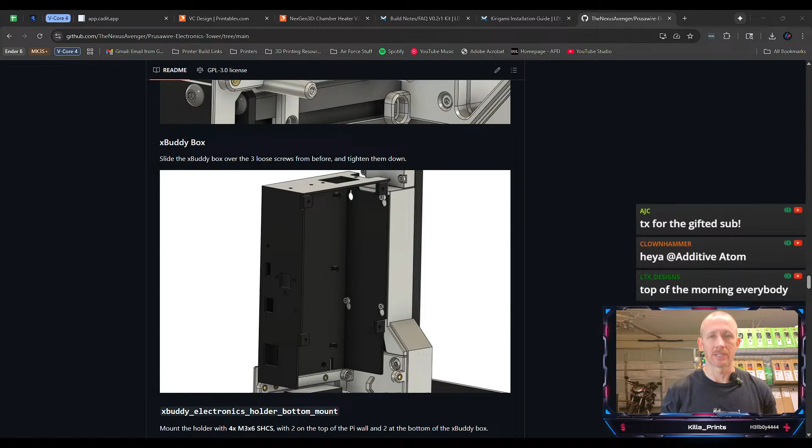So this is where we left off. I didn't have the buddy box, and so that's why we had to pause on Prusawire. But I did order it. I would have finished this last week, but it took exactly 8 days from the day I ordered it to the day it arrived, which meant it arrived Monday after stream. So I've had the buddy box in hand for about a week now, and it was pretty affordable, I think 20 bucks or something. This is it here.

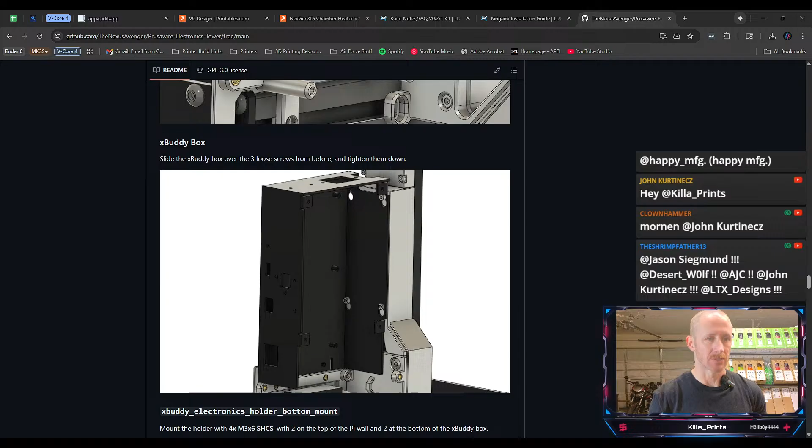So this is where we left off, and basically we just slide this onto the printed parts that we've already installed from before. And then I can add on a couple more pieces here. I believe I have this piece. Pretty sure I have that piece. I thought I did. I could be wrong here.

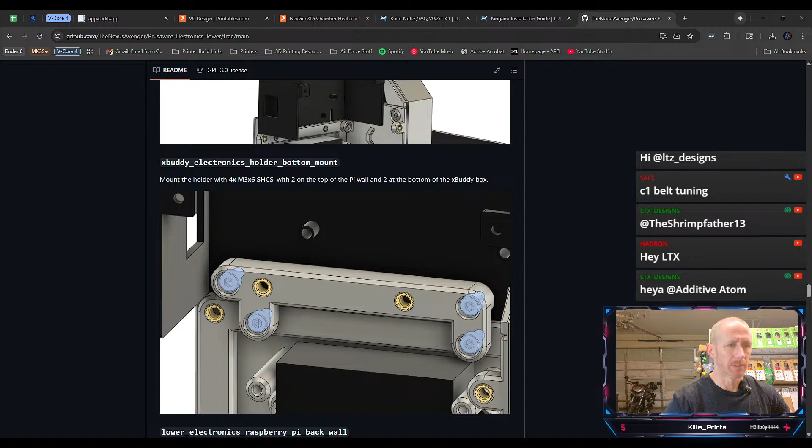But 2 on the top of the Pi wall and 2 at the bottom of the xBuddy box. Yeah, I feel like I printed that, but I'd have to find it. So let me show you where we are on the machine itself.

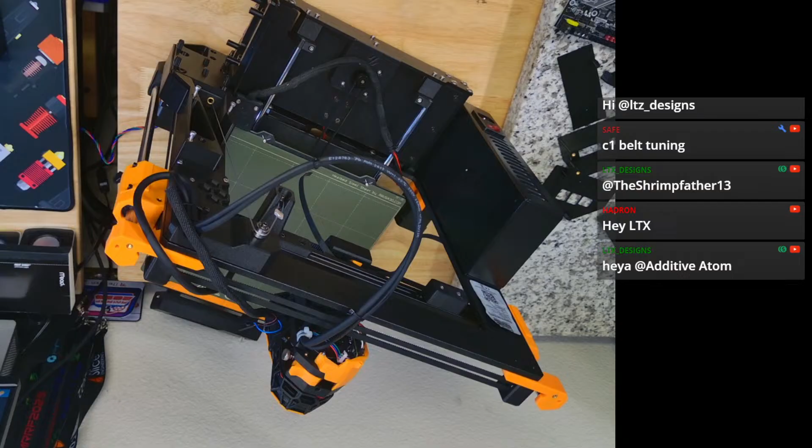C1 belt tuning. What is C1 belt tuning?

What is, oh, and my camera's upside down. What are we doing today? Come on.

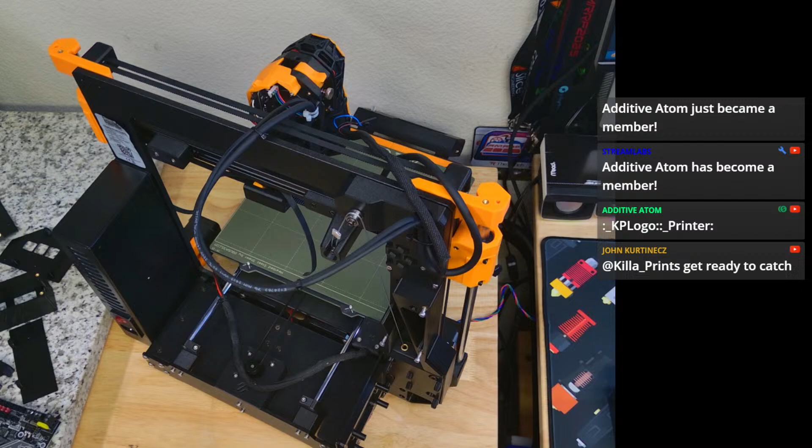We'll flip it that way, and then we need to flip it the other way. This is what happens when you do a Friday stream and then need to reset up all of your cameras and everything, because the Rat Rig is so big it doesn't fit in the screen.

But this is the Prusawire that we've been working on for a while.

And get ready to catch. What am I catching? Get ready to catch. I'm not sure what you mean there, John. You're gonna have to explain.

But anyway, this is where we kind of left off, and you can see I've got - this is not gonna work well, but we've got some parts left from last time.

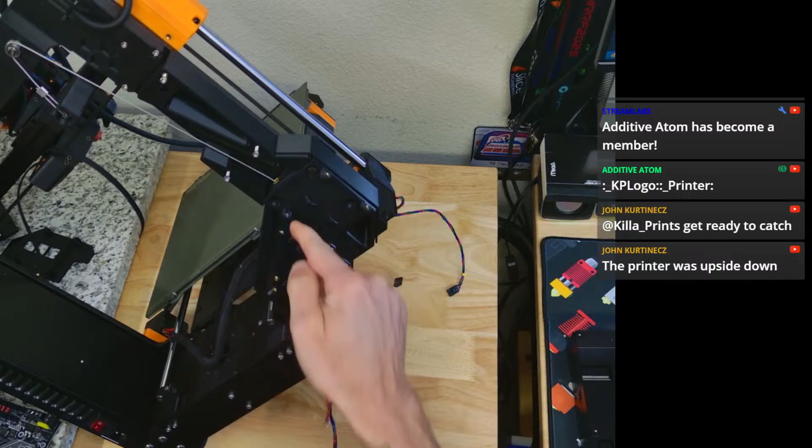What I need to do now is take the Prusa xBuddy box here, and that sort of goes in that location there. And then there's another piece that screws into these heat inserts and into the box itself, and that allows things to connect together. But I don't see that part immediately, so I've got all the parts just off camera here to my left.

And there's one piece that I don't know that I have, and so either A, I failed to print it, which is totally possible because I do that a lot, or B, I threw it away without realizing that I needed it.

So it could be - I have these small crates over here, they're just collapsible milk crates that I put all my Prusawire stuff in, and it makes keeping things together a lot easier for me. But the problem is I just kind of threw everything in here. So it could be, in this case, it could be not.

Just give me a second to see if I actually kept this item. I don't know that I did. I don't know that I did.

Yep, so we're gonna have to print a new one, and that's okay. That is perfectly okay.

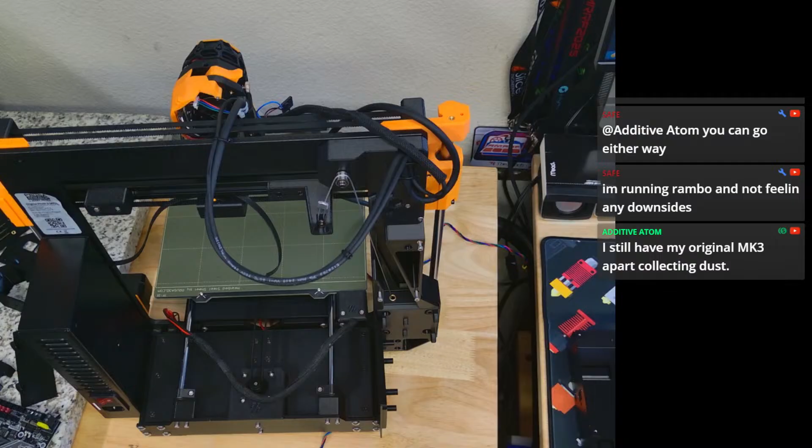Such a nice design, the print. Oh, the printer was upside down. Yeah, sorry, I got you, John. Yeah, I'm a little slow.

All right, so this goes on here. I can print this part later, I'm not really worried about it right now. But that goes on like that. And I know the angle is a little weird, but it's the best I can get without completely removing the Rat Rig.

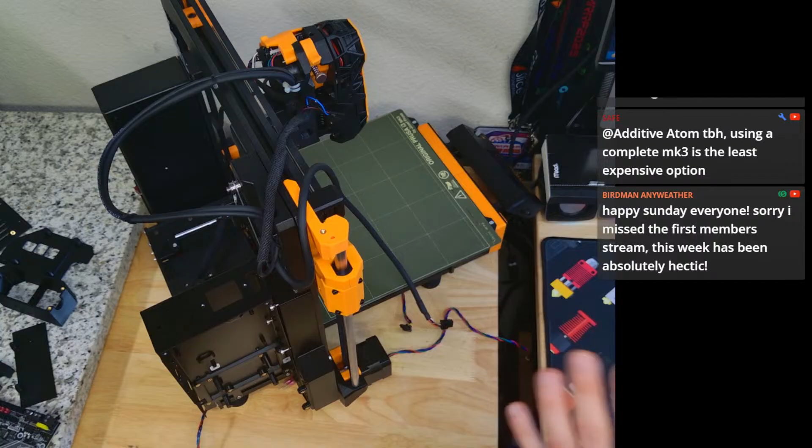So just off camera over here is the rat rig, and it's still up on the bench top. So I've had to move everything so I can have room for this, which changed all the angles a little bit. So I was hoping that more of a top-down look would be a little better.

Running Rambo and not feeling any downside. Does the Prusawire use the Rambo 8-bit board from the Mark III?

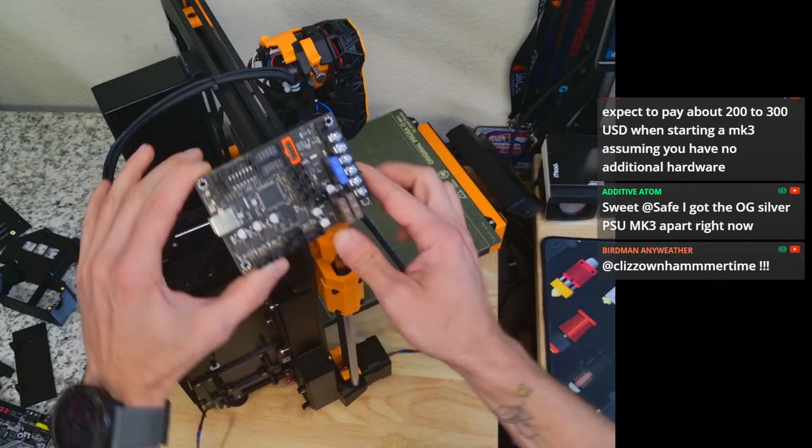Additive Atom, you can use either. So you can use the Rambo board, but I believe you need to run it via USB. So I've got my original Rambo board here, and whoever wins this printer in the raffle will get the Rambo board originally. So this is it here.

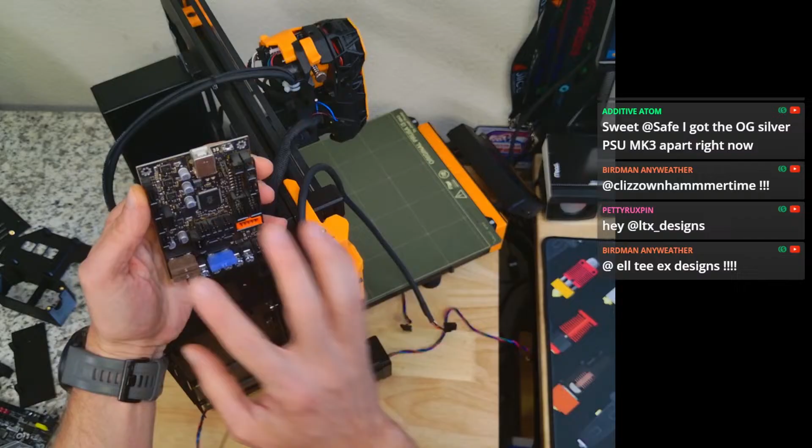It's supposed to work with this, and I will include the case for it if you want to revert. But from what I can tell, I couldn't get it to go. So what I had to do was use the USB-C port here, and I'll include the cable as well. And then that would need to go to whatever Raspberry Pi that you're running, and supposedly they talk, right? But now you have to run a separate power source to your Pi and some other things, and it didn't look as clean as I wanted it to personally.

So instead of using this, I'm going to put in here this. This is the SKR Mini E3 V3. Any Ender 3 style board will work with this. And this will allow a lot more capability in Klipper. So we can run Danger Klipper. We can do extra heaters if you want to, and you can use this for lighting. There's some extra capability you're getting with this board that you would not get with this one.

I hope that answers your question. You still have your original Mark III apart collecting dust. Additive Atom, you got to make it into a Prusawire, man.

It's pretty cheap. If you wanted to go single color, it's one spool of filament and then a Raspberry Pi, which if you're running Octoprint on it anyway, you're probably already doing that. And then of course you need some bearings and rods and stuff like that. Even the motors are stock Prusa motors.

Using a complete Mark III is least expensive, correct?

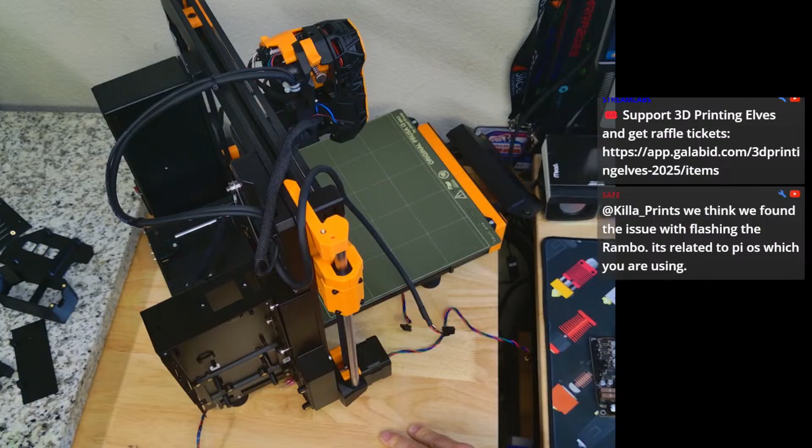Sorry. Killa Prints, we think we found the issue with flashing the Rambo. It's related to the Pi OS which you are using. Okay, so do I need to use a different OS, Aaron? If Pi OS doesn't work, what should I use instead?

No, that doesn't work. I need a longer one. Let's see this guy. Too short still. Let's see if I can get this in here. Gonna need a ball head for this one, but that doesn't really want to. There we go. That is tight.

You got lots of filament and pies, just would have to get the add-on parts. The original linear bearings went out. Your OG Mark III has been rebuilt to the Mark 3S before. I think I have some extra bearings.

I've got some suggestions on things that you might need if you're going to do this. So one of the things, if you're going to do the mod that I'm doing, this is from the Nexus Avenger. I found out about this case mod on the Positron Discord server, but there's a Prusawire channel, and that's where this mod comes from. But it's on Printables, and so if you want the link, I'll drop it here in chat for you, and then you guys can follow along.

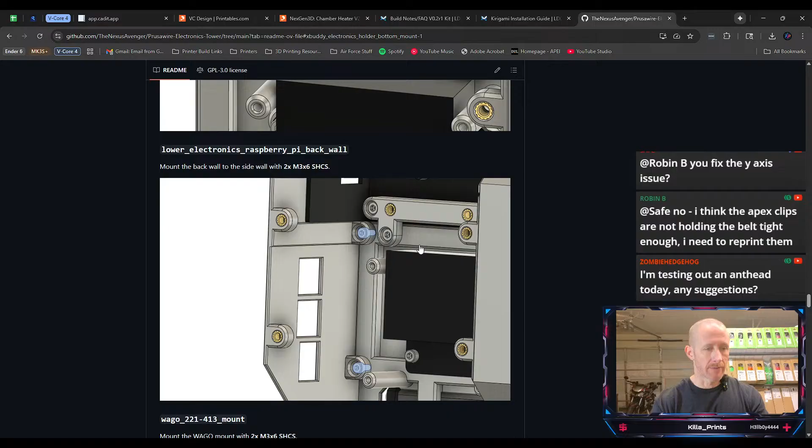And so I'm hoping that I can just do the install and add this on after the fact. But I want to scroll to see if it is blocked by anything. I think it mounts underneath this little portion, so probably gonna need to get that sliced up.

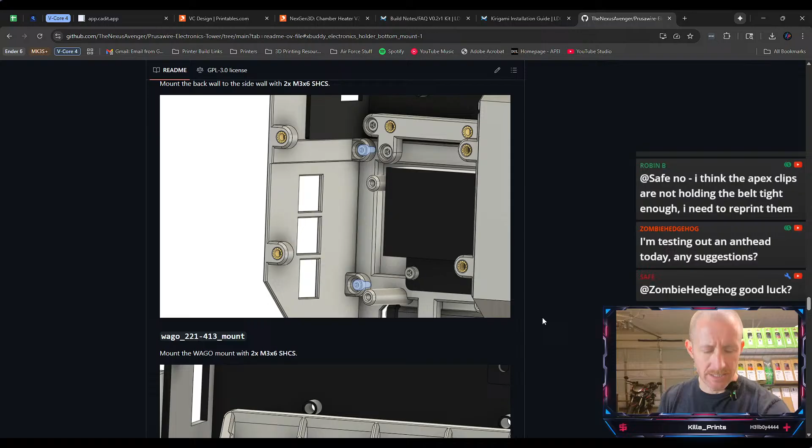That's unfortunate. Let's see, let's do, what did I have on here? Oh, rat rig stuff, so we'll do a new one. I'm pretty sure I downloaded all of this. Let me get over to my folder here.

Electronics tower, and this is called the X Buddy electronics bottom holder. Yep, looks like it. Let's get this going on the H2D while we are talking here.

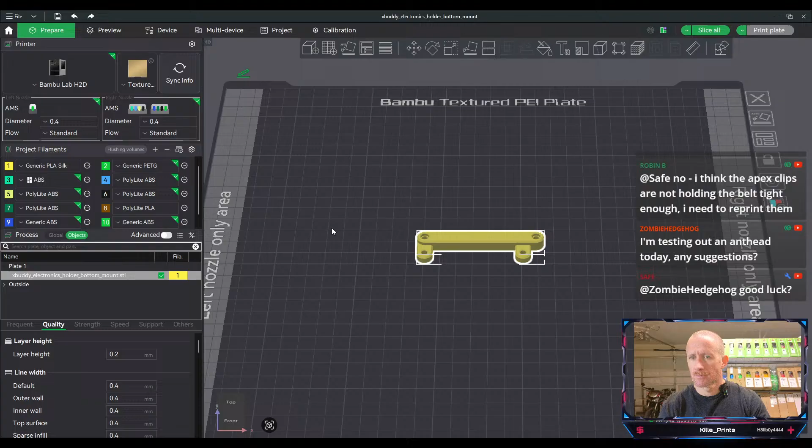That's going to be ABS. Got that loaded, and settings look good to me. Using standard stuff. I think I'm going to turn on Arachne just because, and we could slice. Should take about 30 minutes or so to get through. It's not too bad.

Just double checking everything, making sure nothing crazy is going to happen here. Looks like we got the counter bore bridging inside the hole, so I'm not worried about that. Drop in a few heat inserts and it should be good.

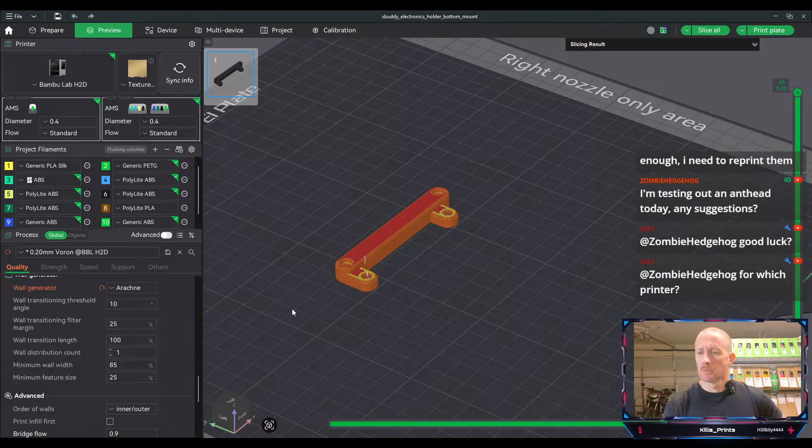Let's print that with ABS black. That sounds good to me. Everything looks good on the printer. Looks like it's warming up. Perfect, all right, we'll come back and check on this guy in a few.

But over here, looks like I can go ahead and add this high back wall piece on.

Testing out an Anthead today. Any suggestions? So I have not personally used Anthead yet, Zombie. I want to - I've got a Micron over here that I need to rebuild. But again, time and space to be able to do it.

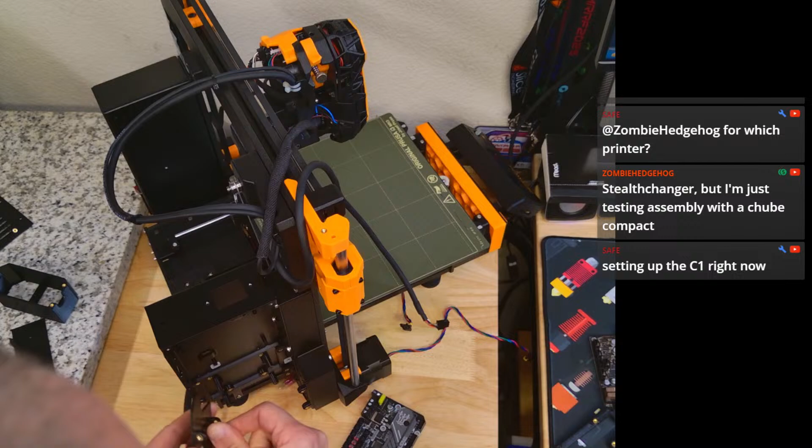What I would suggest though is take your time. It's a small print head, so the space constraints are something to worry about. It's tight getting your fingers in for your 4010 fans and things like that, and then keeping the wiring very neat when you're running a toolhead board. If you're running a toolhead board, that's what I would suggest. So just take your time and try to keep the wiring neat. Other than that, it's a pretty straightforward toolhead.

I didn't have too many thoughts on it other than that and dropping things on the floor. But I do want to use one. I have a spare Chube Compact that I would love to use with an Anthead. I just got - I made an order yesterday for a bunch of parts for A4T, so I'm going to redo the toolhead on my Trident to an A4T, and then put Anthead on the Micron. But again, time constraints.

Stealthchanger, but you're just testing assembly with a Chube Compact. Yeah, you're gonna love the Chube Compact if you haven't really played with it yet.

I don't know what 4010 fans you're planning to run, Zombie, but if you can get your hands on some high static pressure fans from either Fabrico, which I'll show you the ones I like to use for that kind of thing - this is one here, yeah, so I'll show you these. If you don't have any of these, I would highly recommend you do.

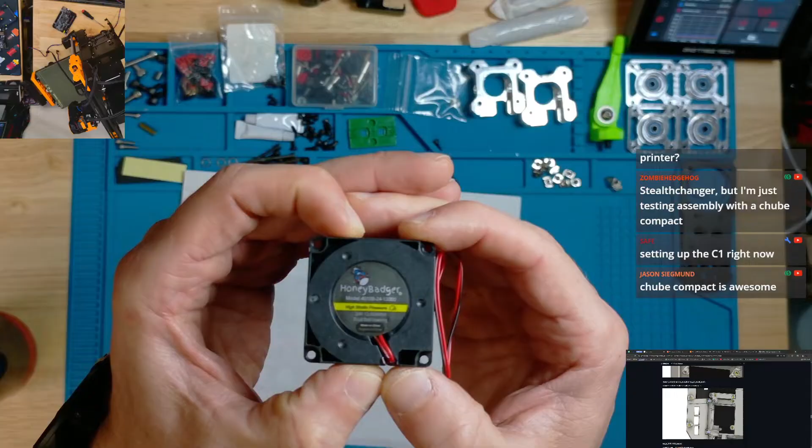So this is the Honey Badger high static pressure fan. It's a 12 volt fan - I'm sorry, this is a 24 volt fan, but a lot of them are only 12 volt. So pay attention to your voltage or you're gonna blow out some fans. These are a little more pricey, I want to say they're $7 to $9 depending, I can't really remember. You could do this one, which I really like.

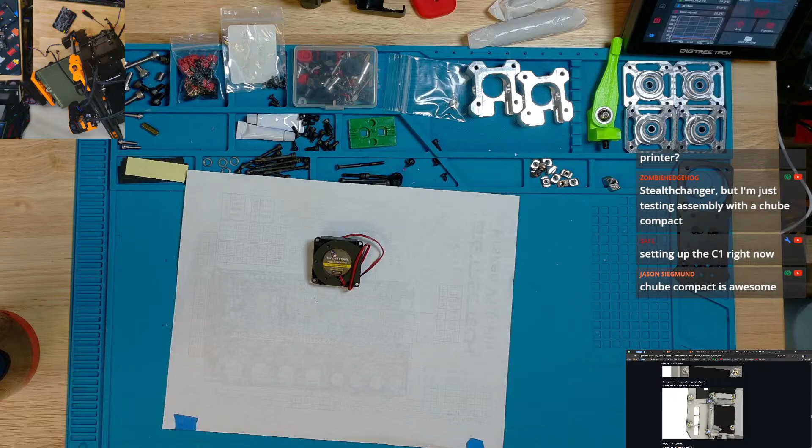They got a high RPM. But then also I've got some Berserker fans in here from West 3D, and they work pretty well. So here's another pair, this is another option.

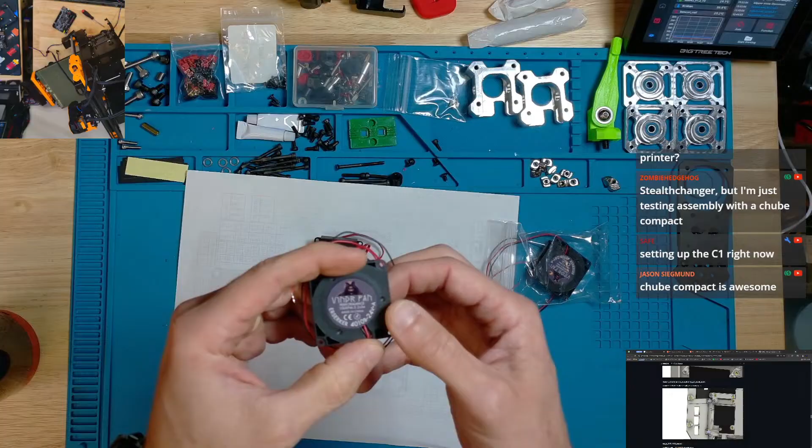These are 2-wire fans, so these are also 24 volt. You can do these. They do have different sizes though, so I think the Honey Badger fan is a slightly different size than a normal 4010. So pay attention to that when you're printing your parts. That's probably another recommendation I'd give to you.

Safe, what is the C1? I'm not familiar with that. What is the C1?

Chube compact is awesome, Jason. I've been running it on the Antithesis since probably late April. Typically I use Honey Badger fans. I've gone through and thrown away a bunch of no-name brand cheapo 4010 fans to really replace those sorts of things with quality parts. So I've been getting rid of a lot of my no-name cheapo fans, or using them for mock-up, cutting the wire off to test fit parts. Most of mine are Honey Badger or Berserker. I've got some GDS, but things like Winsinn and BQ and other no-name stuff, I've really gotten away from all that.

Alright, so while that part is printing, it hasn't even started yet, the H2D takes a while to warm up. I would have used the X1 Carbon, but it's currently finishing up a print. Actually, it just finished, while I was saying that. So we'll let that cool for a second, then I'll pull it off and show you what we were working on.

Oh, Core 1, my bad. I'm not familiar with that C1 term.

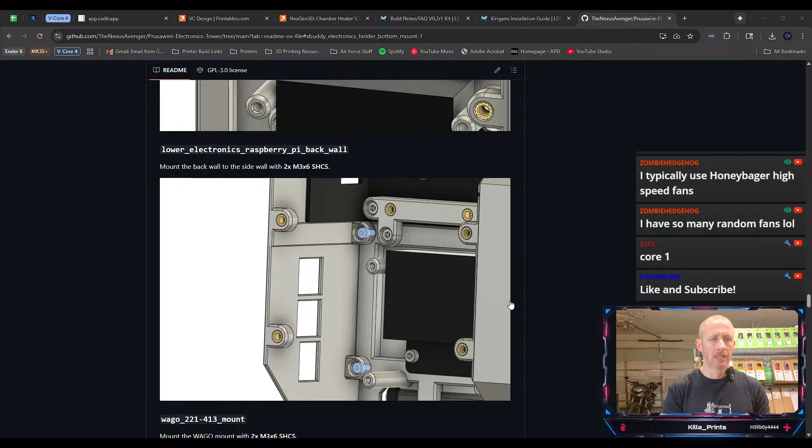Sorry, it's been getting cold out here. In the mornings we're in the upper 50s, around 58-60 degrees. As it warms up throughout the day, it gets roughly 75-80 degrees out here this time of year. I feel like I'm sort of getting a little sick or stuffy.

Yeah, it's awesome. I want a Core 1, but I don't want to buy a Core 1. If I can get one for a steep discount or find one secondhand, I would love to, but I don't want to buy one.

Hadron, I agree, this is the best part of the year. I love this time of year out here, I'm gonna miss it. Well, Clownhammer, good with the bad, right? This is the nice season. We get a similar season in the springtime, but the summers are brutal.

You won a Core 1? Oh wow Zombie, congratulations man, I wish I could win a Core 1. Our cold isn't really that cold, true, not really that cold, but cold enough to where you wear pants and sweatshirts and things like that. So winter enough without the downsides of winter.

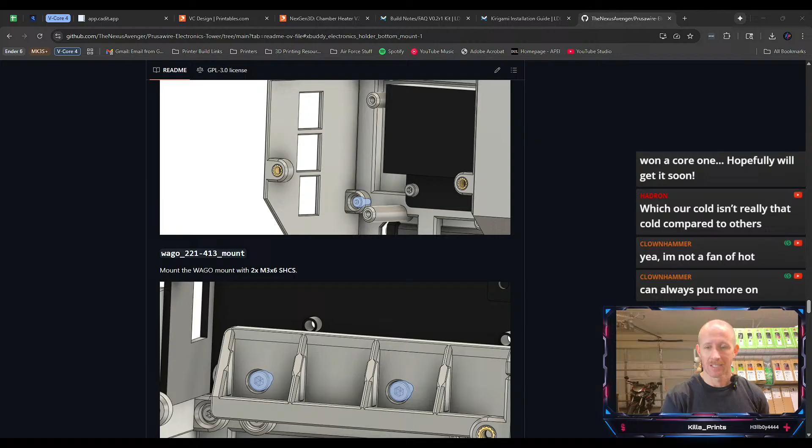Can always put more on, correct. Also not a fan of hot, correct. But my wife gets three times the votes that I do from Death Racers at 3DPrintopia. Congratulations, yeah, I didn't know that, well that's awesome.

I can't do this yet because it sits on top of the piece that we need, but I can get the Pi installed, so I'll probably do that.

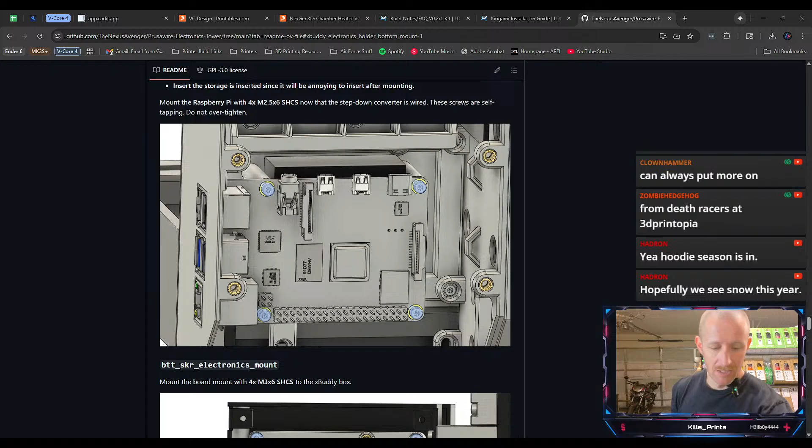Hopefully we see snow, it would be good. I wouldn't mind seeing some snow, it's been a few years.

All right, we can get our Pi in here. So again, I'm going to reuse this, this is the Big Tree Tech Pi, and I'm going to use that as my Pi here, only because I can add a 24 volt inlet. Also my ports are on the opposite side as they would be. If you can see in the picture, basically the input side and the GPIO pin side are flip-flopped on the Big Tree Tech Pi. That means, I guess, better access here based on the picture I'm seeing.

That goes in like so, fits in the space it's supposed to fit in. The problem I'm seeing though is there are standoffs here, I'll show you this. These are not long enough, just not long enough for what I am seeing.

So that's another challenge. I think what I have to do then is put some standoffs in. Luckily I had some, but these posts are not long enough, or the ports in this panel just need to be pushed in. Maybe another, let's measure this out, maybe 10 millimeters or something. Let's get a measurement just for posterity's sake.

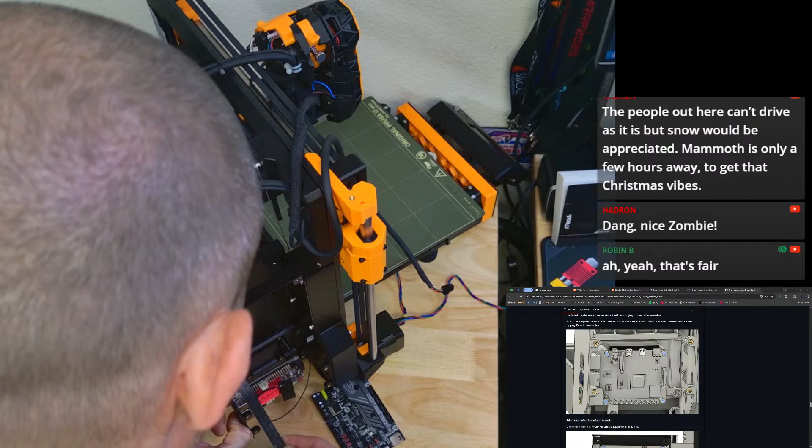If I were using an authentic Raspberry Pi, then these would line up, but this one is not the case. The outlets on this one are about 10 millimeters off, and they don't line up with the Big Tree Tech Pi. That's interesting. So on the Big Tree Tech Pi, this most forward top hole doesn't align with the post, so we're only going to be able to use 3, and that looks like maybe 10 millimeters too close.

So really what needs to happen to make it right is, I know this is difficult to see, but these holes here need to shift in about 10 millimeters. That's a change I can make in CAD, but I'm going to solve it by adding on some standoffs. I think these are M2s, and I think they're 10 millimeters long as well, which might be what we need here. Yeah, right at 10 millimeters. So luckily we've got 3 of these that I can use.

I don't know if that's already been fixed or not. We'd have to go back and look, but yeah, these are not correct.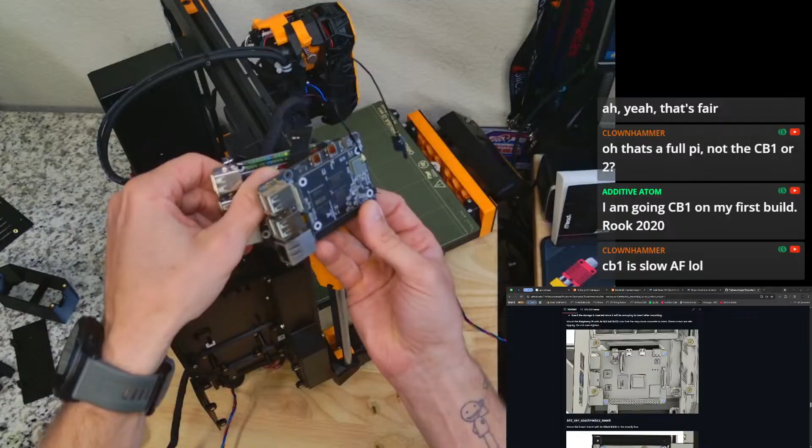But it's just a converter board to allow you to have some USB ports and some inputs over here with HDMI or whatever. This one is an actual Big Tree Tech Pi, so it's got your SD card and some additional CAN bus ports and things like that on it. It's a full featured board, whereas this one is just like a carrier, like a converter, and it gives you the same form factor as a Raspberry Pi. You can see the difference here if I move this out of the way. The GPIO pins are swapped top to bottom, and then also your input, output ports, so like your USB port and stuff like that, are swapped top to bottom. So there are some differences.

Again, the reason I'm using this one is because it does accept 24 volt. It's also got the onboard CAN bus port and a 5 volt port here. There's also a bridge, what's it called? Like a, I forget what it's, man, I'm really forgetting the name of the item that connects to these 2 pins here, but it bridges across this heatsink and it will activate your CAN bus. I forget the name of it, but you will need that to use CAN directly from the Pi.

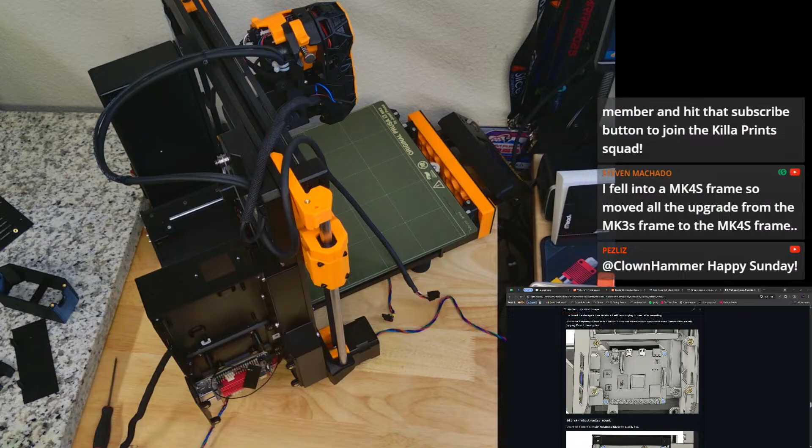13 Prusawires exist now. Nice, yeah, I would build one for myself if I had another Prusa. This has been a pretty decent fun build. I'll tell you, this right here, in my opinion, this should be standard. This electronics box should be a standard part of the build. This is really nice, and I think it's really going to clean up the wiring, eliminate a lot of the craziness that was going on underneath when I first tried to do this. So I am backtracking a little bit for quality of life reasons, to make this a nicer build.

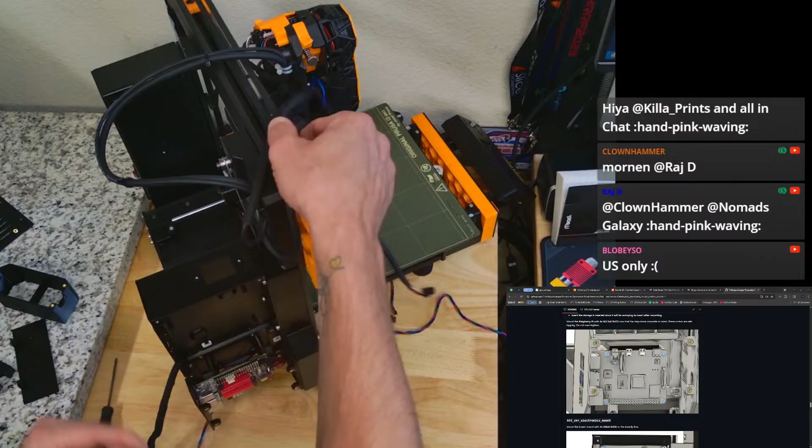All right, so that is on. Let's see what we got to do next. Trying not to get ahead of myself too far here.

I am going to have to go back and redo this portion. One thing I did, my Wago mount thing is not the same as, here we go, is not the same as, we're using generic Wagos here. And these generic ones are slightly bigger in the Z-axis and in Y. So I had to modify this in CAD. I'll upload it, it seems to work now that I've tested it. I'll upload this as a remix on printables, so if you want to use these, you can just jump in there on the remix and pick this up.

US only, yeah, sorry. Shipping printers internationally that are fully built is a challenge that I don't want to deal with.

Well, you would agree it requires something that isn't standard. It does, but I would also argue that the standoffs and the PZ probe that we recommend are also not standard on the Mark III, so maybe it's a recommendation, not a standard thing.

One man's opinion. You're the boss. Do what you want.

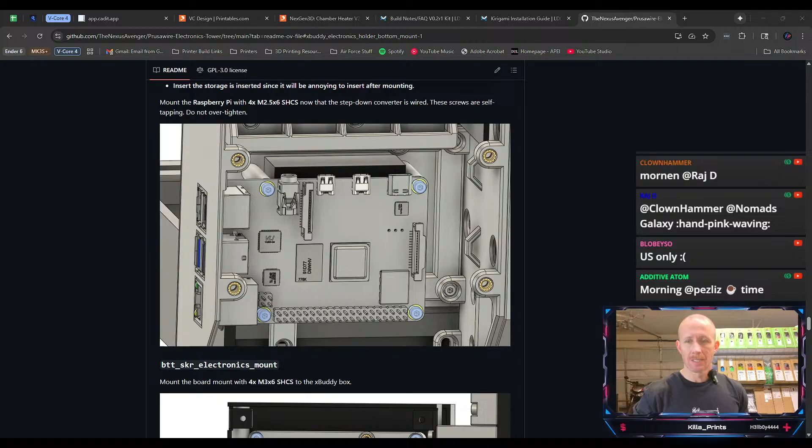Steven, when are you going to start building yours? Are you starting right away?

Default is Pinda. Correct, default is Pinda, but we recommend PZ probe and we recommend heat expansion joints on the bed. So maybe we recommend Mark IV box and tower upgrade. Again, just one man's opinion.

I think I can install this bracket without having to mess up anything, so let's do that. I didn't think I would be breaking out the hardware so early.

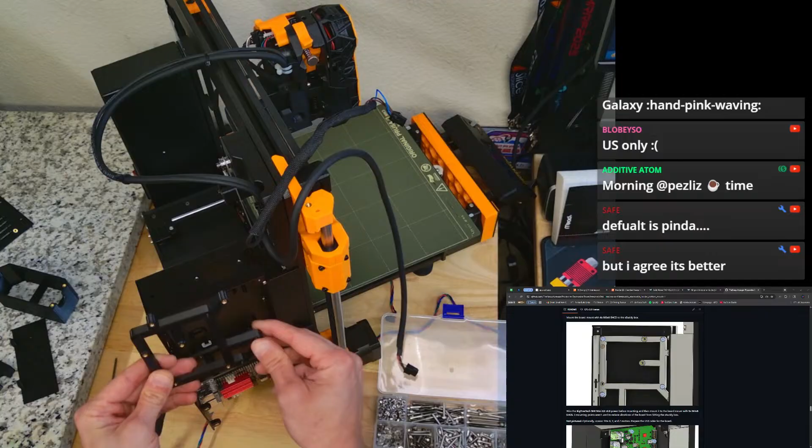Orientation is this way. Let's see how big hardware. I think I can use M8s, M3x6s through here. Yeah, that should work. And there are mounting bosses inside for the standard buddy board, and these just connect to where that original board would go.

Like to get a couple started before we crank down on it.

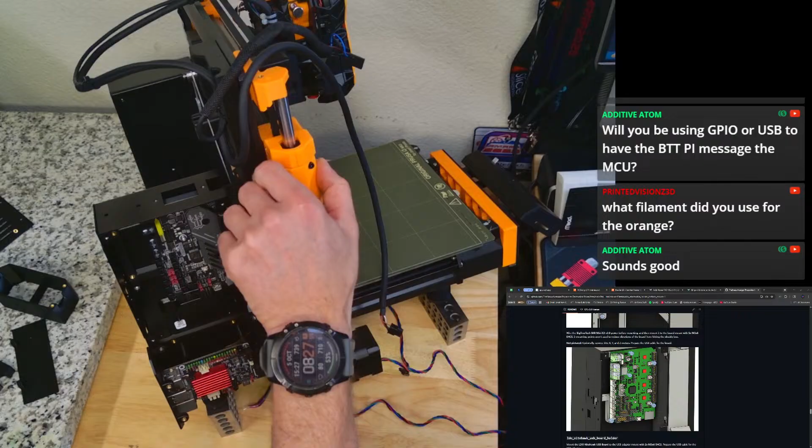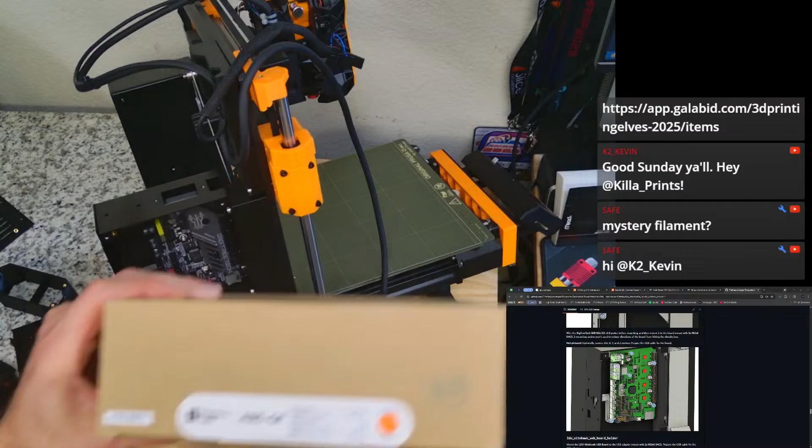You tell me, what filament is it? This is some ABS glass fiber that I got from DFH probably a year ago or more. It is no name, I think now it goes under the name Decent Filament, and you can get it over there. But that's what I used, mystery filament. Since that time, Bambu has come out with some ABS glass fiber of their own, and that's what this one is here, so I've got some of that as well. I thought I was going to use this, but I didn't have enough, so I paused on this. I had two spools of the other stuff, and that's what it is.

So I think it's Decent Filament is what it's called right now on DFH. And it is Decent Filament.

Hey, K2 Kevin. Hey Kevin, I got something for you. Let me grab this real quick. I've got something that's got your name all over it.

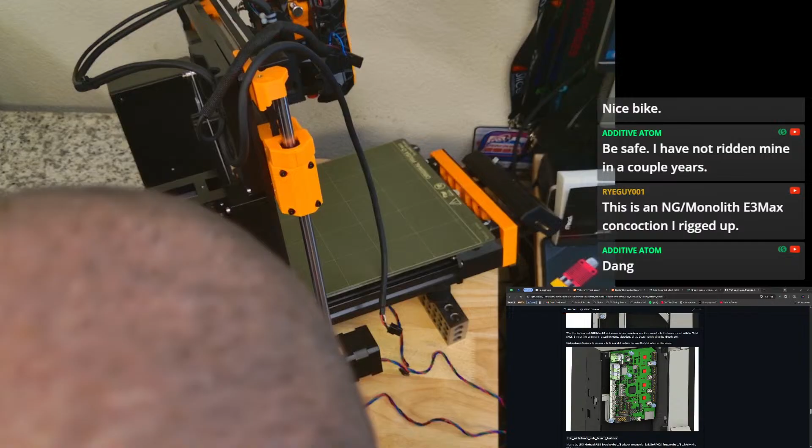Out here, unless I drive about an hour, I can't really get to the fun twisty parts, so I don't ride as much as I would like to. Especially being so close to LA, it gets a little sketchy with the drivers. And if I go the opposite way away from LA, it just takes a while to get to any sort of fun roads. There's a lot of straight flat roads out this way where I'm at - well, I guess where Hadron and I are at.

Why are you not playing nice? It's annoying, the screw keeps trying to move instead of just going in straight where it should go. Why are you not working here? There we go. Printed parts, that's why. Printed parts trying to screw together don't always go together like they should, so I'm gonna massage them.

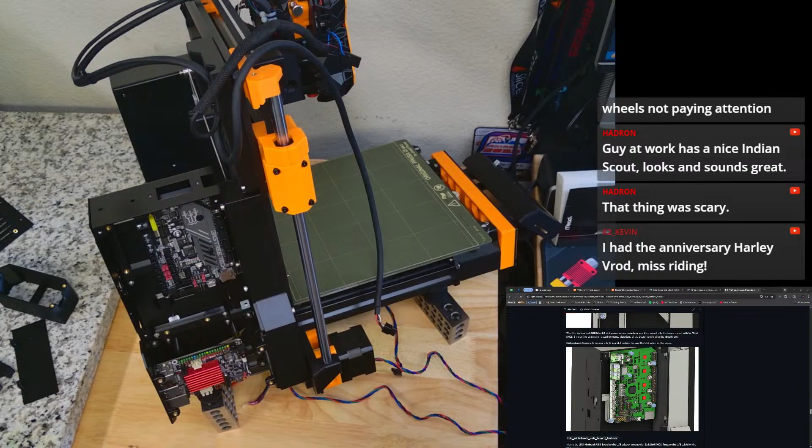A guy at work has a nice Indian Scout. Seeing people riding in t-shirts and street shoes is crazy. Well, they will learn at some point. You can't fix stupid, so sometimes people have to learn the hard way. That's unfortunate, but it is true.

Alright, so this goes here, upside down. Trying to look in there and see where that heat insert is.

You had the anniversary Harley V-Rod. Nice. You said you had it, so you don't have it anymore, Kevin?

So for you guys that had bikes and got rid of them, why get rid of them? No more time to ride, or fell out of love with it, didn't want to deal with, I don't know, the danger of it? I'm just curious what your reasoning was.

Purely being transparent here, but I'm considering selling it just because I don't ride it as much as I would like to, and I don't want it just sitting either, but I do like riding when I like riding. I'm not afraid to ride or anything like that.

It just - those are being a pain, you don't want to go in there. So there's probably some more work to do on this modified part. The center one between the two Wagos we have is just very tight to get in there, so I think maybe I need to remove that little bump in the CAD model. That just does not want to go no matter how hard I push. I mean, I want it to be tight, but not that damn tight.

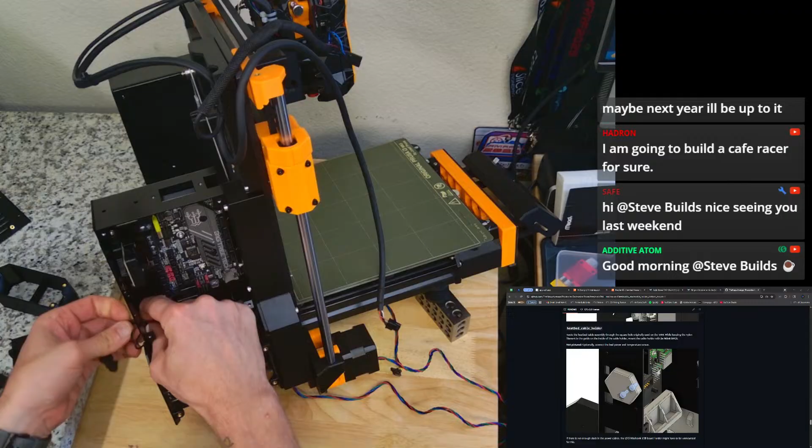Alright, heat bed cable, route the heat bed cable assembly through the square hole. Okay, do that, like that. Bed is all the way forward so we get the most travel. And then here's one of the bed cable pieces and parts.

There should be a top cover, I think.

It helps you de-stress, Fegley. Yeah, I de-stress that way too. So on days I do ride, I tend to - oh, that's the wrong hole, it goes up here in this hole - I tend to take the long way home. Just some days.

We may have to extend these cables. At the very least, I gotta cut these terminals off of here, because these are the heat bed terminals on the SKR, and these have forks. Those need ferrules, so we'll need to trim that, add that in there like so. This is main power up top, and then you've got two heater ports here, probably for extruder and bed. I'll figure those out once we look at the schematic, but that should go that way, which means this cable has got barely enough slack in it to do that without too much craziness. This power panic is not going to work anymore unless we route it over to the power supply itself, so we'll probably have to separate that out from the harness.

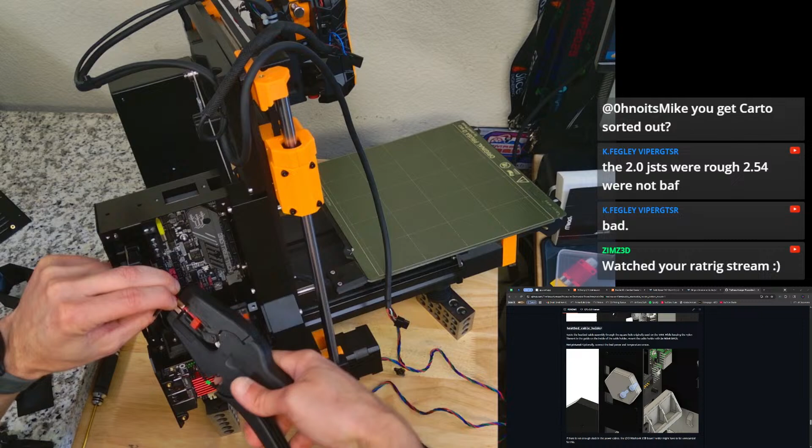We'll strip these down. I like to take about 10 millimeters off the ends of this, and that should be enough to catch a ferrule without sticking out the end.

I need to bring my trash can over here. Like, walking back and forth is getting old. Grab that. There we go, it's a little better. Alright, and in the meantime, let's find my ferrules here.

Carto on your Nighthawk 36. Watch my rat rig stream. Zims, thanks, man. What do you think?

Yeah, we did that on Friday. I was pretty frustrated at the end of it, I'm not even gonna lie. I think I probably wasn't in the right mood to be doing it in the first place, but then having to deal with all the different hardware and things like that, and just, I don't know, I think I was just angry at it.

But yeah, I was working on it again this morning. It seems to, configuration-wise, be fine. I was unable to test movement or anything like that to really get into the verification before stream today. But I did get everything talking. I've got no errors and stuff like that, so we're on the right path. I'll probably play with it a little more after today and get some B-roll on it.

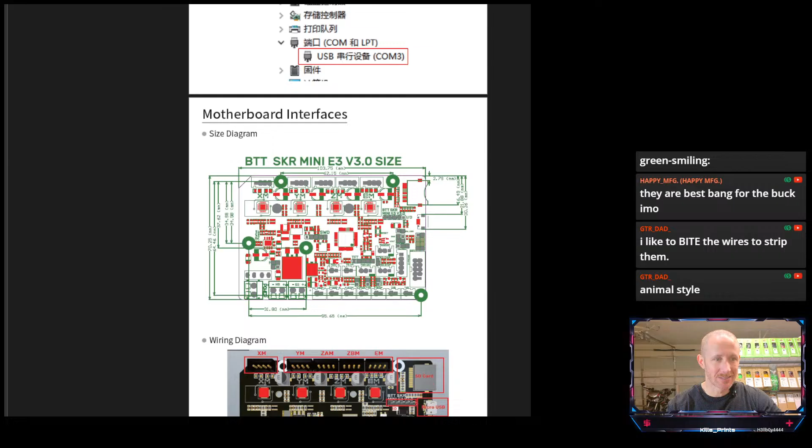I just need a pinout. Where is your pinout? Here we go.

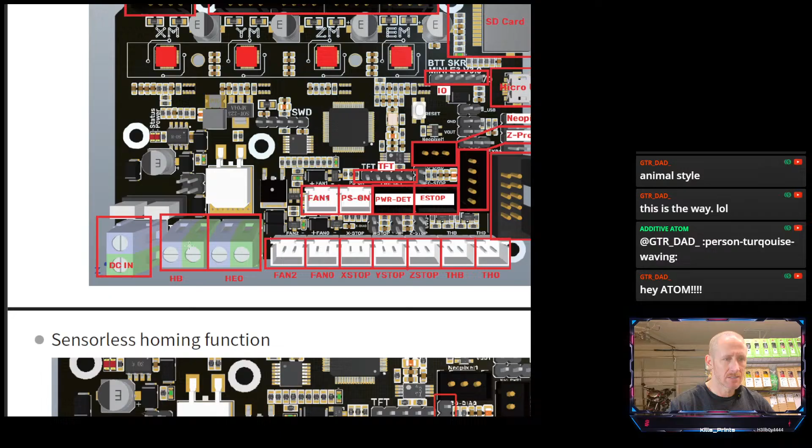So it looks like the heater bed is what would be the top one on the board based on its orientation. What side? I guess green is the positive then? Does it mention that up top? Yeah, here we go, this is better. So heater bed, let's do it this way. So heater bed is the top one, negative is at the very top, and we'll do it that way.

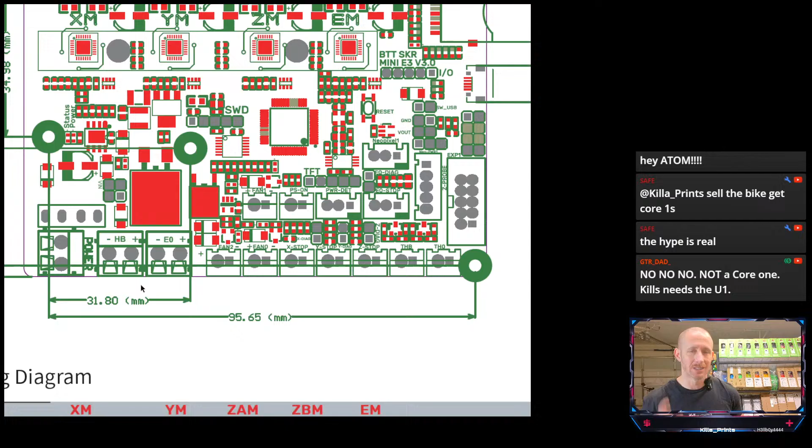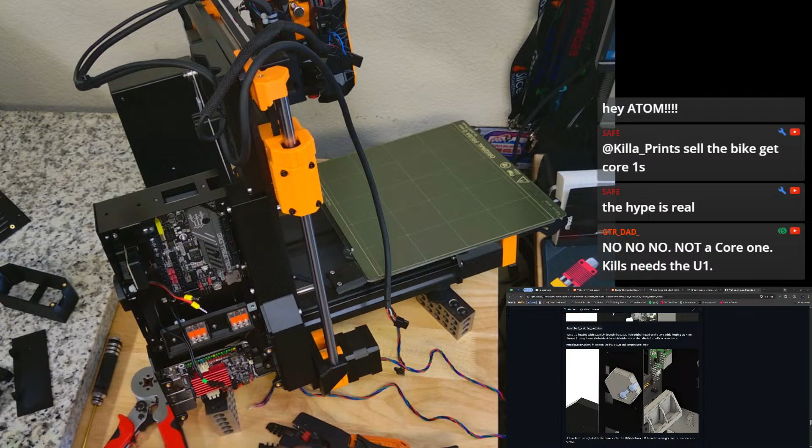Killa Prints, sell the bike, get a Core 1. Aaron, if I sold the bike, I would likely not get a Core 1, although I might, I don't know. I would much rather - if I sold the bike, the only reason I'm really considering it is, I guess, two main reasons. First is I don't ride as much as I would like, but that doesn't mean I won't, because I could potentially be moving soon. And when I do that, I just thought about this - I should probably take this out of the way for clearance reasons. I might ride again a lot more if I move, when I move. But I could use the cash. So I don't know, it's a battle. It's like anything else, right? You have a hobby that you love, but you don't get to do it as much as you would like. So you have to consider, do you continue holding on to that hobby and all the things that come along with it, or do you pass it on and allow someone else to enjoy it? I haven't decided.

Just trying to find a screwdriver here. That'll work. No, not a Core 1. I need the U1. So, GTR Dad, I like the Core 1. Sorry, the U1 and the Core 1 for that matter.

I'm skeptical of the U1. I don't know if it works as advertised. I'm still nervous about supporting Snapmaker, is what it comes down to. I've seen some people have really good experiences, and from what I've seen on the internet, people are not having trouble or anything like that. It seems to be doing well. I don't know, I'm still skeptical.

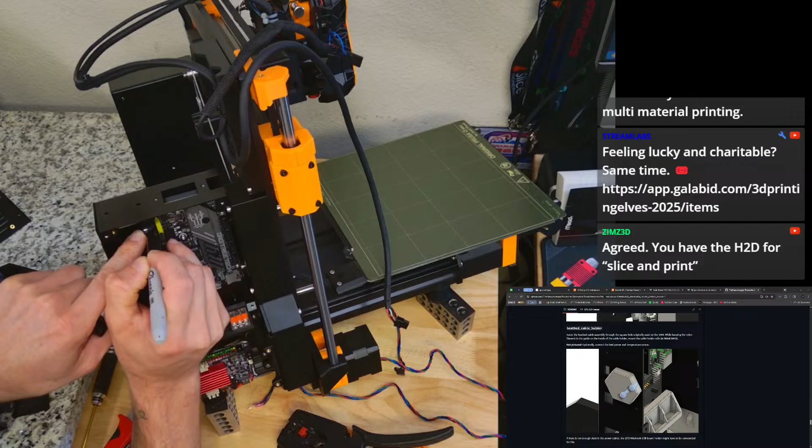That's for peace of mind for later, and then we'll get the black Sharpie out and do the same for the negative side. And then I'll do the power as well. So going back to my PDF, power looks like, so the one on the right is your negative, and then the one on the left is the positive.

I really should get paint markers. This works in a pinch. Like that, there we go. That's cool, you can even kind of see it on camera.

You already have the H2D from... Yeah, correct, I already have the H2D. Killa Prints owning novelty 3D printers? No! Yeah, I mean, I do like my unique, sort of different 3D printers. Don't get me wrong, but...

If I'm constantly tinkering, constantly playing with new things, I need to have something that is stable and can just print when I need to print parts, because I still do print for a side hustle as well. I have the H2D for slice and print, yes. And I've been considering doing an H2S just to slice and print, but I'm waiting to see what the H2X looks like with its nozzle swapping and see how that works out. If that one is looking pretty good, I might just get one of those and hold off.

You do like your Prusa Minis? I had a Prusa Mini, I couldn't get down with that. It wasn't as reliable as I really wanted it to be. I sold that off to a buddy, I don't know, a couple years ago.

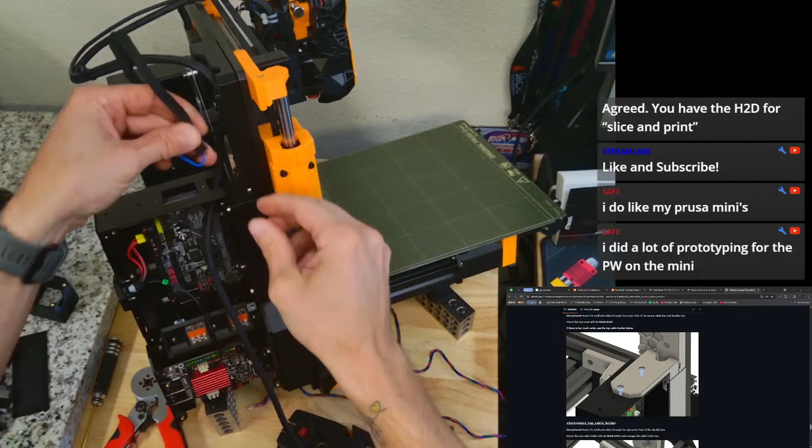And then we've got our pinda wiring that we'll need to recrimp or repin somehow, and that goes in here as well.

Got a little bit of cable sleeving on it. Just want to pull that up out of the way. I recrimped it and extended it for the Rambo board, but then I changed course and decided to do this one, so now my crimps and wiring solders don't really apply anymore. Maybe we can just remove that and connect this where it's supposed to go. Just want to slide this cable sleeving up to a point that makes sense, and then we'll put a zip tie on there to hold it in place.

All right, so I think I could put this top bracket on here. This one is just something to retain those wires, close off this top hole, and make it look a little nicer. That sort of wedges itself down in here. Come on, a little tight on the part, so I think I'm gonna loosen this one and drop the part completely behind the workbench. Oh, so let me climb under here real quick and get that.

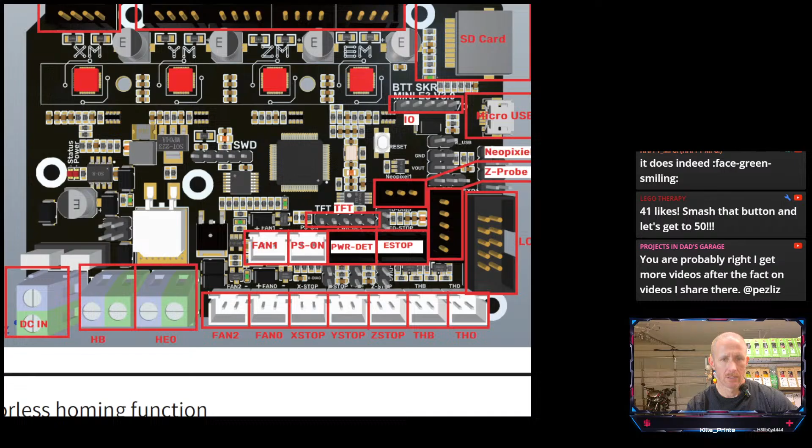Yeah, I'm with you, Projects in Dad's Garage. There's some work to do on the backside. You do both? Doing both is awesome.

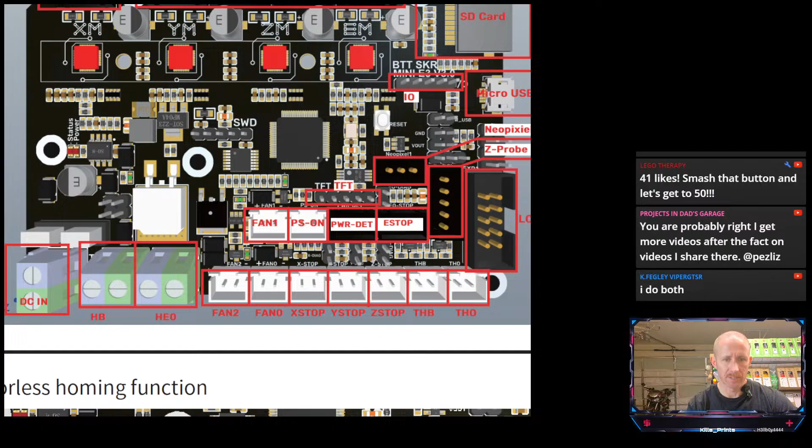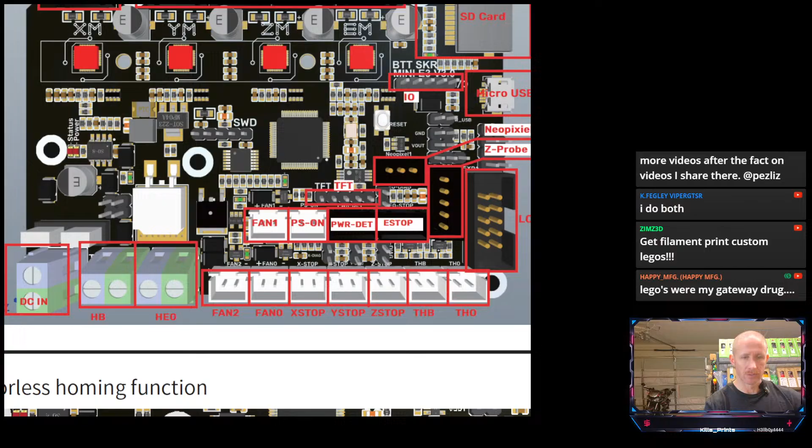Thermistor is this bottom one here, looks like bottom right corner. On the board, that one's actually labeled, so good to go there. And while I'm here, let's see what we plug in. There's an input output sort of in the middle of the board there. I wonder if that's where I can use for the Pi, or will I have to use the LCD port? Not sure yet, we'll have to figure that one out. I know I can at least get power somehow.

Legos are fun, kid just got that Game Boy Lego set yesterday. I forgot about that, but that's a cool kit. They got the Game Boy one, but also they did the TV, like the NES thing as well. So they're really getting into some Nintendo lately.

I think what I'm gonna do is kind of cut that about there. 3, 2, 1, go, we're committed now folks. All right, we'll strip this off and make a better one. For these I usually just take about 2 millimeters off the end of the wire there, don't need very much to connect the JST. And then my connections are here.

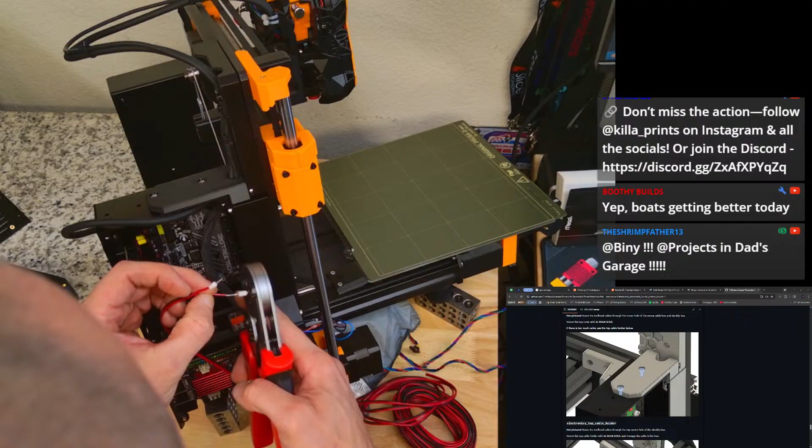Something like that, and then just verifying again on the right hand side of this board. That's where our power goes, so our DC in, and then ground to be on the left. Oh, sorry, backwards. Ground is on the right, power's on the left. I marked everything earlier, but it is going to be tough getting these in there. It's very tight at the top of the case, but there is enough room to round the corner and get both of those in there at the same time.

Now, once we just put some tension on these screws here. Oh, well, I have to undo them first. Turns out they were already tight. Take those all the way out. And look at those back inside. There we go.

I know that's hard to see for you guys, but it's just making connections.

And now the question is, where do I route these wires? Down the left-hand side of the board or the right-hand side? I don't know that there's a wrong way, but probably not easy to see this, but there are printed zip tie points on the part here down near the board, and I want to say those are probably going to be better used for the motor cables that are here, because motor cables will come up through the side, hitting all these tie down points and then connect to the board. So probably best if we keep power wiring on the right side here, and then that can go right straight down to our Wagos at the bottom.

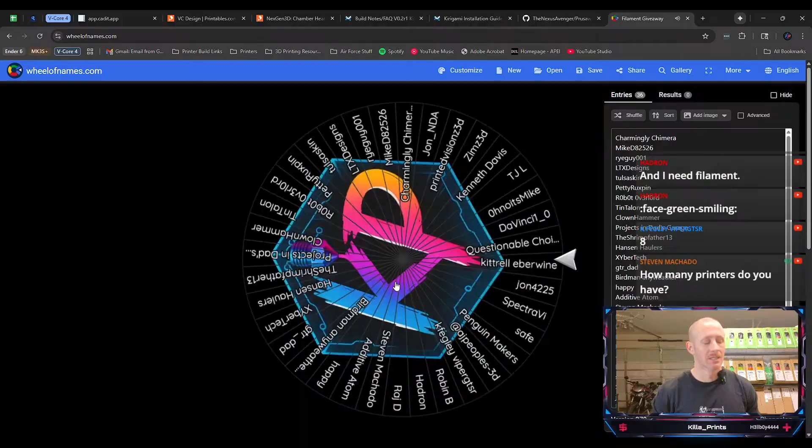How many printers do I have? It's a hard question to answer. In various stages of working, roughly 24.

Petty Ruxpin, you hacked my stream. You hacked the giveaway and somehow got yourself some LDO filament. Petty, I need you to tag me in chat so that I know you're here. Yeah, Robot Overlord, you were right there. I'm with Shrimp Father, this is so rigged. We should just ban Petty Ruxpin from all the streams. Petty, if you don't enter, you don't win. Love it, you're not wrong. Can't win if you're not here. So Petty, like always, you've got 69 seconds to tag me in chat, and you're already about 20 seconds in, so banned.

Wonder if he plays the Powerball. If I was that guy, I would play every lottery. Holy crap, he wins everything. I'm surprised he didn't win a Core 1 at 3D Printopia.

But here's the thing, he hasn't mentioned anything in chat yet, so we may remove him and do another spin. But you've got about 30 seconds, buddy. Bang, banned. Oh man, illegal, that is impressive. And coming up on 15 seconds. He's waiting until like the last second to hit the chat. He probably punched out, I haven't seen him chat in a while, so he's probably not even here. Straight to jail, building suspense. Hey, charmingly Chimera, he's going to chime in at 68.5 seconds.

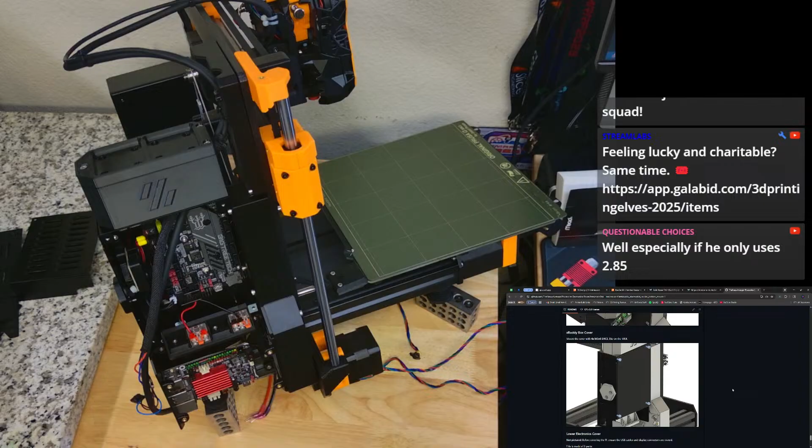Let me check in here. Yeah, looks like we might go with 14 gauge because that's what I've got. Wunderbar.

Especially if he only uses 2.85. Dude, that stuff is hard to find, but I tell you, they do. What did he tell me? I was just up there last month. I think he told me they go through something like 50 kilos a month or something like that. It's not an insignificant amount. Yeah, it's quite a bit.

All right, I think I can reuse this. So I made a lot of this wiring originally for the Einsy Rambo, and now it doesn't really make sense, so we could probably eliminate this. This mess is what I was trying to get away from when we're swapping to the tower that we're using now. As you can see, this is not super nice, and I couldn't give it away this way.

So we can remove the Wago connection down here and remove a lot of this stuff. But instead of just tossing it, I think I can reuse some of this wire. This is the same wire that we use for the main board, we can use that to power the Pi real quick.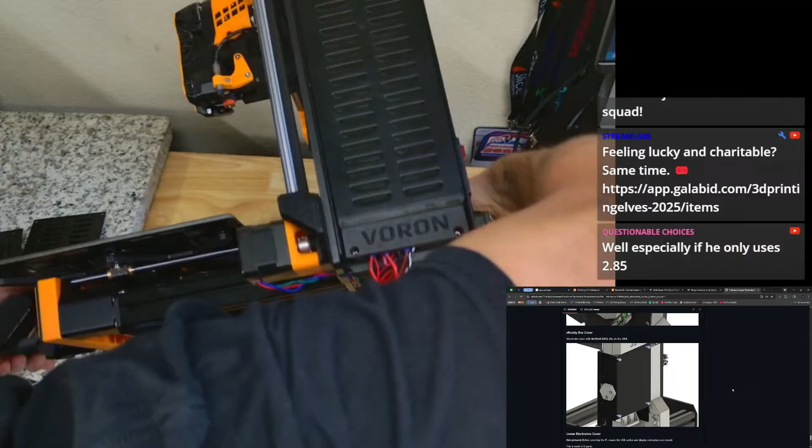I think I just take some of these. Actually, let's remove it from the PSU. Let's take it off the PSU side here. Oops, trying not to damage this. There we go, just let that sit like that. Sweet, let's take this off because that'll be a little easier for me.

The questionable choices, I think he uses a lot of 2.85 because that's what he has. I don't know that it's mandatory. I think he would like to use 1.75, it's more common, you can get more colors and things like that, but he's got so much of the 2.85 that you can't help it, you have to use it.

Right, yeah, so these two can come off. All right, this can come out of here. There's one. And this set here.

I think I might have used ring terminals on there, and that's why it's not coming out. Good idea to use ring terminals if you got them, but not always the better choice.

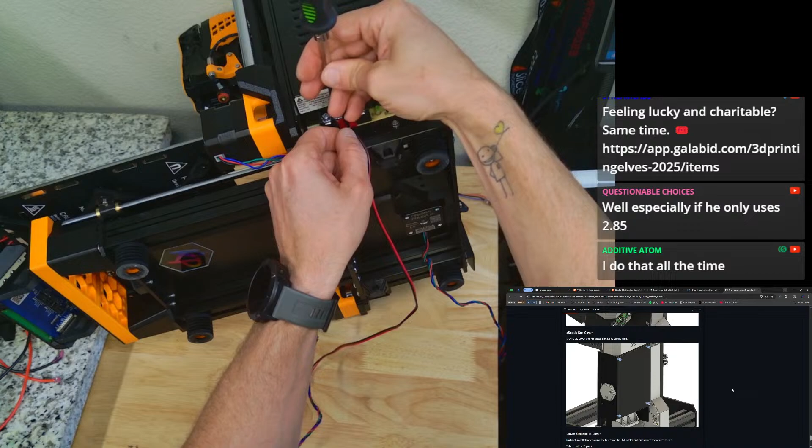You do that all the time. What, block the camera with your head? Yeah, I'm not used to it being where it is. It's directly over me right now, so I have to lean back out of the way to clear that. But it's not the most comfortable, easy thing to do.

Okay, and then with all these motor wires hanging out, I love detachable motor wires. I wish this had that. So, wish this had that. What am I knocking off now? Okay, just knocking stuff off the workbench.

Okay, so this is that same wire. I think there's enough room in there to just route this up behind everything and out the top. If it's too short, it's going to be too short by like 5 or 10 millimeters. It's not ideal, but I think I can go this way. Let's try this. Move this way. Alright, that's gonna barely be fitting there.

We got lucky, boys and girls. It's like barely big enough. And see, this is what I was talking about. This does have ferrules on it, but I think the diameter of these orange ones are slightly smaller, so it allows them to insert into the Wagos better than the white ones that we had used before. And that was our initial screw up, using the wrong size.

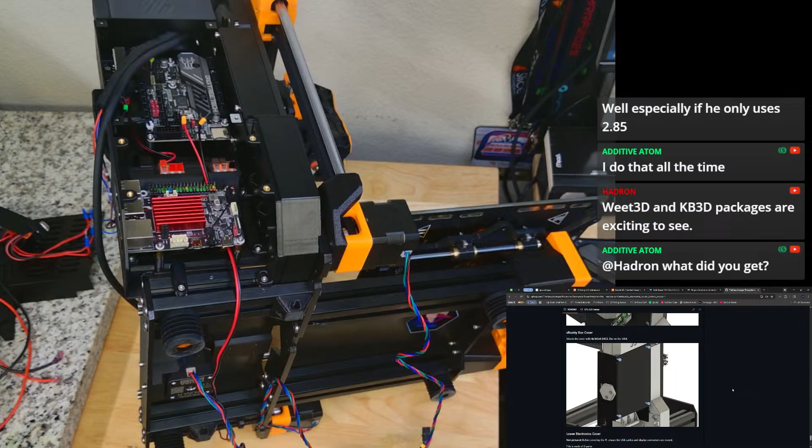So this one goes like so, and it'll fit down in there enough to be able to grab that. Or it makes me look like a liar. If not, I'll chop this one off too and see if we can make it happen.

No, it's not staying in there. I wonder what the deal is. Yeah, it's these terminals. We're gonna have to pull it off. Really don't want to remake the cable, so I hope this is long enough to do it.

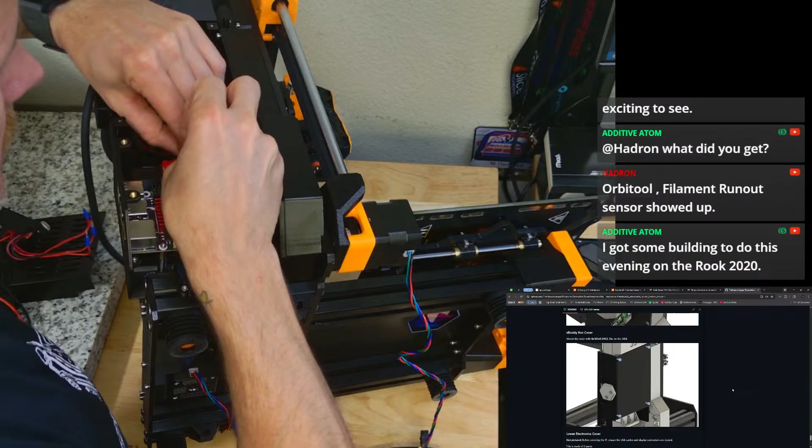Oh boy, I'm trying to make that turn there, but the wire is just not participating.

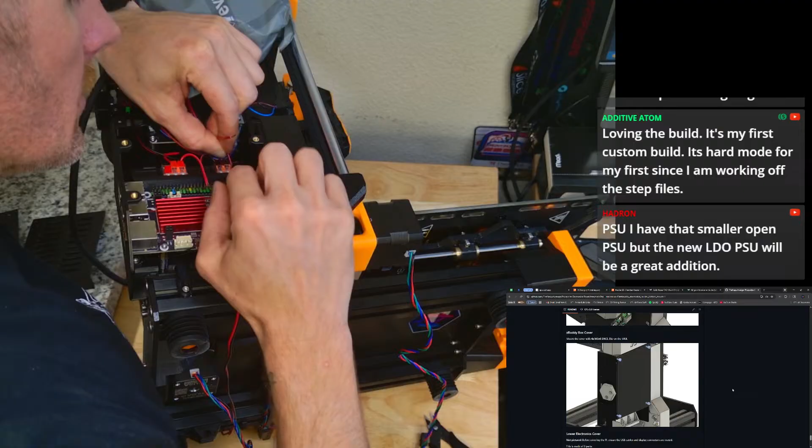I am Rook curious, I'll say that. But I'm also looking at their other ones too. Simple Core - I know Happy did a Simple Core and he liked it. So I'm kind of curious about a Simple Core.

Okay, so there's that. And this doesn't need to be very long. This is just going right here to the Pi, so maybe 8 inches long on this guy.

I've been watching and learning from Steve Builds and others for years. Additive Atom, I think a lot of us kind of grew up doing that. Loving the build, it's your first custom build. It's hard mode for your first, since you're working off the step files. Yeah, but hard mode will teach you a lot. I mean, if you really want to get hard mode, you could do like a V0. That's pretty hard mode.

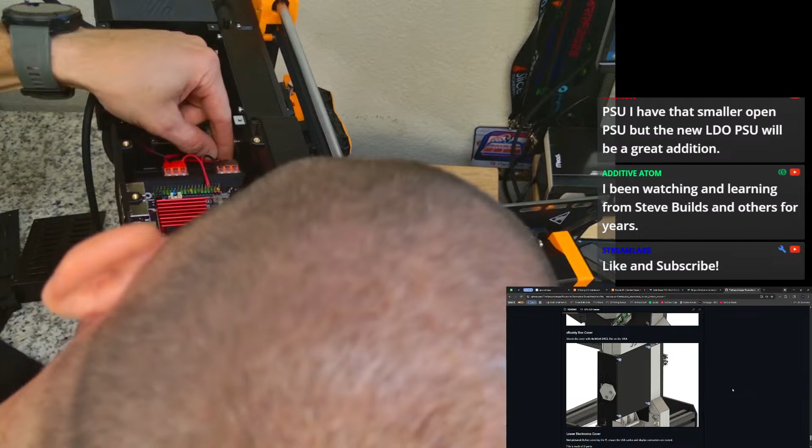Actually, there's a small gap that I'm gonna run this under, just make it look a little cleaner there. Pull that down. And then from here, we can strip these out, put some ferrules on, just like we did for other things, and finish up the wiring on the Pi here.

And we'll chat and chill for a little bit before I turn you loose over to Steve. All right, a couple more of our ferrules. Let's do some of these smaller orange ones, I guess. Also doing it on stream, aka doing it live.

Heck yeah! I need to come over and check out your channel and catch your stream. When do you plan to be streaming? You have a date, time? If you have a date and time, I'll do my best to be over there and support, man.

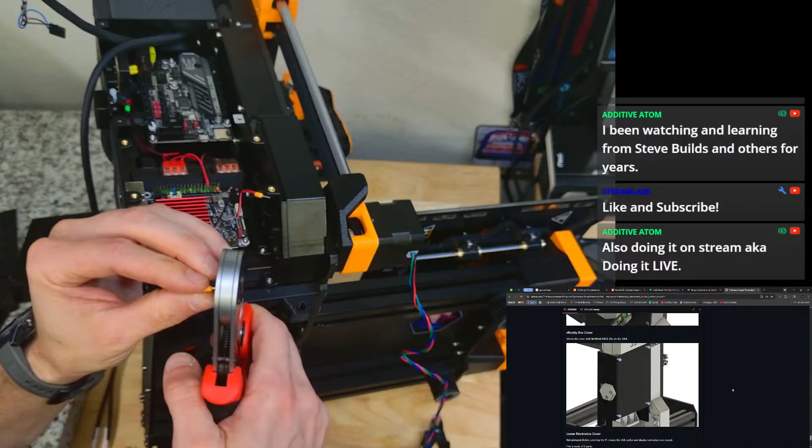And I've already done the same on the Pi. These are already marked with a Sharpie, which is which. So, getting this connected in there, probably going to need a tweezer. And then let's make sure that those are already loosened.

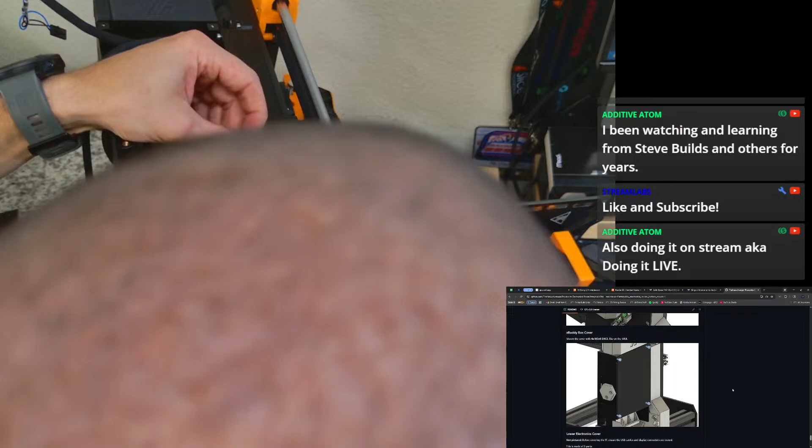This is probably the best feature about the Big Tree Tech Pi, is being able to run 24 volts. It really cleans up your wiring - less modules to have all over the place, and less different levels of voltage going all over the place. In my opinion, that's kind of the downside of running anything 48 volt as well, because now you need a separate PSU with separate wiring for all the things, so it just makes the build a little more complicated.

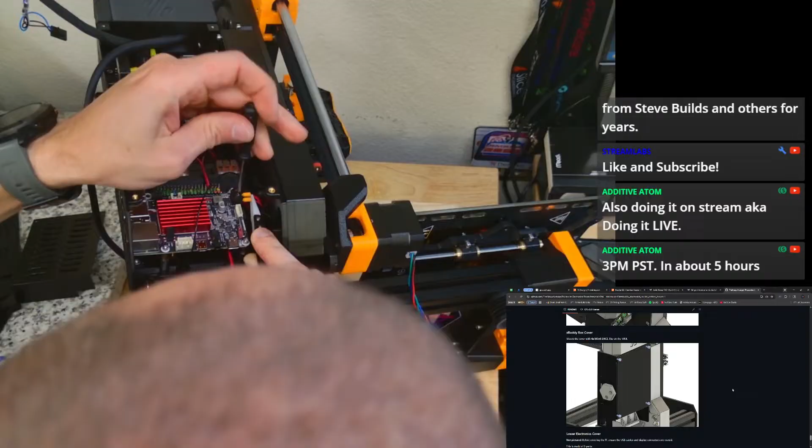Yeah, that looks good. Let's try this last one here. 3 p.m. Pacific, in about 5 hours. Cool, I should be able to make that. Are you planning to do 3 p.m. PST every week, or is this just a one-time deal? I think I'm interested.

3 p.m. is usually when I try to come out of the workshop, get out of the garage, and go back in the house and just kind of hang out with the family in the afternoon. Because I'm out here a lot, I'm not gonna lie to you - if we've got nothing going on, I'm probably out here almost all day Saturday, and then of course Sunday I'm out here doing this stuff. So I'm sure there will come a day where I am not able to be here because we got family things that we want to do or whatever. And that's just part of it, right? This is not life, this is just finishing up projects and talking trash with people.

Gonna move this guy up here. This is just a 3D printed, what's it called, tie down point. And it's like super tight, so let's put some pressure. There we go, and that'll help me secure that wire there to the frame.

I need to print one more for over here. I didn't do that very well. These big ones can go away, I don't need these big ones anymore. So things I need to print - I need to print a couple more zip tie points for the frame here, and that's just to help clean up the wiring. And then I could 3D print maybe one tie down point here in the center and just put that on with a little VHB tape.

And that should work out well for that. You can already tell that we have really cleaned up the wiring on this thing. Now all I've got is the one wire going across to provide 24 volt power to the opposite side of the machine, and then you have 3 motor wires coming in for your X, Y, and Z axis.